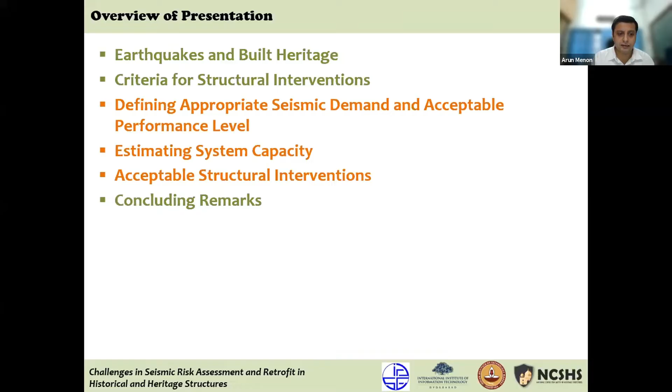So to begin with, if you're looking at built heritage, cultural heritage property, and earthquakes - natural disasters - earthquakes are some of the most violent natural disasters one can think of. India has seen its share of natural disasters and their effects. The human tragedies are there on one side, but then the silent loss of historical monuments, heritage structures is also something that occurs in each disaster, each natural disaster, each earthquake in any part of the world. Some more, some to a lesser degree, and this really comes from the concentration of historical property in different countries. So as far as historical constructions and heritage structures are concerned, there is an augmented vulnerability to natural disasters. This is because of their age, the deterioration over time, the various things that happen to the structure in terms of expansions, change of use, and so on.

The Bhuj earthquake, for example, on the 26th of January 2001, 20 years plus now, in the Kutch district alone there were about 15,000 heritage properties registered, and the earthquake resulted in about 10,000 heritage structures that were destroyed or extensively damaged, literally lost. We have seen no dearth of natural disasters after that - the Indian Ocean tsunami in 2004, the Kashmir earthquake in 2005, the Sikkim earthquake in 2011, the Kedarnath floods, the Kashmir floods, the Nepal earthquake which also affected parts of India, the Myanmar earthquake in 2016, and many more. This is only bound to keep increasing over time, the list will increase. It's something we really have to deal with, because when it comes to cultural heritage, once we lose it, there is very little way you can retrieve it. You can retain the memory of what is lost, but the tangible memory of what is lost is lost forever.

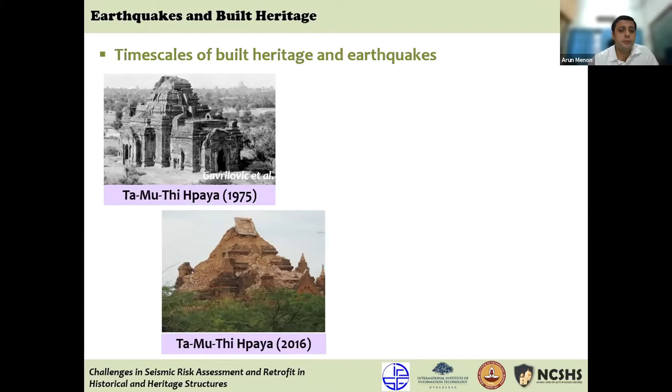But this site has seen earthquakes at regular recurrence intervals. In 1975, there was a massive earthquake, and in 2016, most recently, the same site was affected by an earthquake as severe as what happened in 1975.

As I said, this is not just in places like Burma, but also in India. If you take Bhuj, for example, we know of the Allah Bund earthquake in 1819 and the massive Bhuj earthquake in 2001 - comparable in magnitude and effect. The Nepal earthquake: we had the 1934 great Indo-Nepal earthquake, and Bihar was significantly affected, and 2015 was a very similar event. Bagan, as I said, in Myanmar, 1975 and 2016.

There's a wonderful book with respect to cultural heritage, built heritage, one could look at. The foreword of that book, written by Sir Bernard Fielden, begins: lessons must be learned continually, and we must always be aware that we live between two earthquakes.

When he says between two earthquakes, the professional - the structural engineer, the civil engineer, the architect, the historian - is dealing with historical monuments between two natural disasters. It's very unlikely that the same professional, in his or her career, can deal with the monument at two of these points in time. That's simply the different time scales of a professional career versus the recurrence intervals of these earthquakes versus the timeline of the existence of the monument itself.

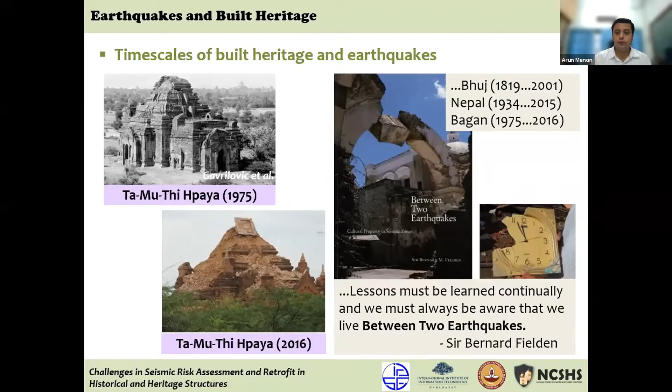When you look at buildings with a design life of 50 years or 100 years, the likelihood of the building experiencing an important seismic event twice gets lesser and lesser, but not so for historical monuments that have been around for quite some time.

Now, coming to the Indian context, we face the dilemma of the magnitude frequency relation in a country like India. To quote Professor S.K. Jain, in one of his landmark papers on the Indian earthquake problem, he says the Indian subcontinent faces a relatively high frequency of large earthquakes and a relatively low frequency of moderate earthquakes.

This has an impact because the frequency is such that within a generation you don't see too many moderate earthquakes, but also the chances of seeing a massive earthquake are relatively low. But someone in your family, your great-grandfather or grandfather, possibly experienced a massive earthquake. A few generations later, the memory of the earthquake is lost. So the memory and impact is very different in a situation like India, where the frequency of massive earthquakes is relatively large.

If you look at Bhuj, 180 years is the recurrence interval of that massive earthquake. The Nepal-Bihar earthquake is on similar lines. But if you look at how many magnitude 5 or magnitude 5.5 earthquakes a certain territory witnesses - to change the culture of building - we are quite badly placed. So there's a low frequency of moderate earthquakes and a relatively large frequency of these massive earthquakes.

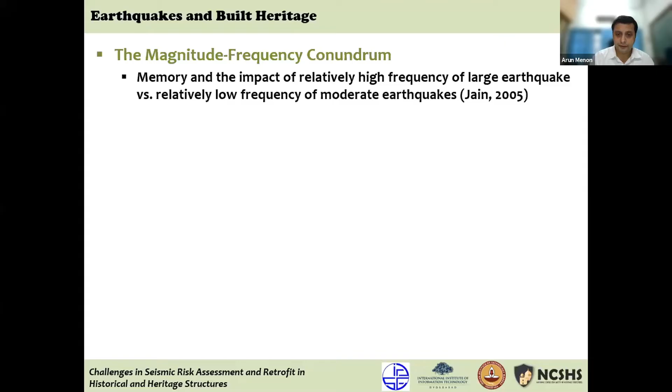So very often, because of the nature of the earthquake problem, we tend to be unprepared. The memory of the earthquake fades, and that is why very often even historical monuments are just put up the way they were, with very little interventions to ensure that before the next earthquake, adequate mitigation measures are built into the structure itself.

I'm just referring to this to give a sense of how different our problem is compared to other regions of the world. For example, the Pacific Ring of Fire, parts of California or New Zealand, or Italy or Greece, where the earthquake problem is much more present within the timeline of the human lifespan.

The 475-year return period global seismic hazard map is what you're looking at, and it actually reflects where we have a challenge. In this slide, you're looking at the updated map of the World Heritage Sites. Of course, the Bureau of Indian Standards is in the process, and today is a very important day, of looking at a new zonation map, and I'll have to make a significant change to this.

The map you currently see is from IS 1893 Part 1 2016, showing the 4 zones, Zone 2 to Zone 5. Superposed on it are white dots, which are the updated list of the 40 World Heritage Sites, the UNESCO World Heritage Sites that India has, of which 32 are cultural sites, meaning built heritage, whereas 7 are natural. One is mixed, with both natural and built heritage, and that is Khangchendzonga National Park, where there's some built heritage as well.

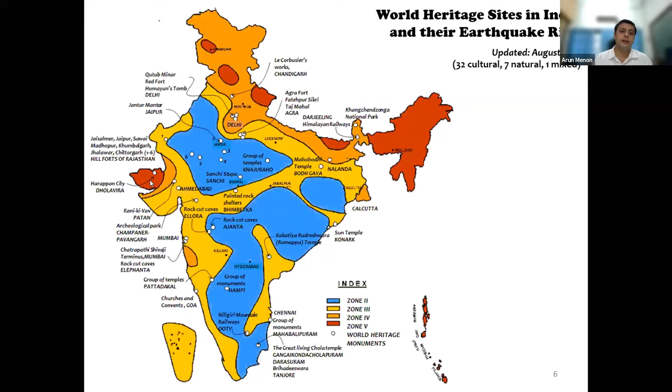Moving on, the fact remains that you need to look at the issue of timescales - certain regions not experiencing earthquakes within historic memory, but other regions seeing frequent occurrences, Nepal for example. The fact remains that if earthquakes have been in human memory for a significant period of time and multiple times, then you will see a change in the building culture.

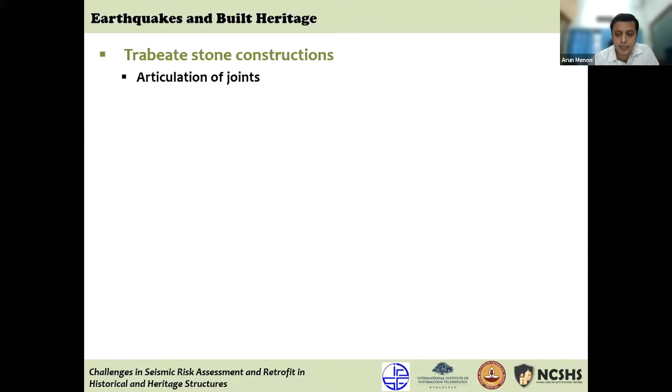And that's very important. So let me look at the issue of these stone constructions, trabeate stone constructions, post and lintel constructions. If you look at how joints are articulated, you have monolithic stone members, stone columns and stone beams.

My focus is on South India, where you have mandapas all over the place. If you look at how the joints are articulated in these historical constructions, you will see that they are simply supported. There is no positive connection, and no interlocking at these joints at all. If anything, there is some curvature, and that is only for alignment of the stone beam on the stone column. So we don't see any articulation of joints.

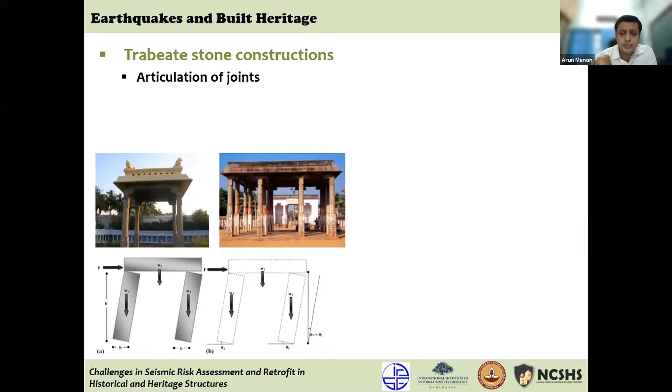You don't see any seismic resistant feature in the building vocabulary. If you look at peninsular India, and at construction details of historical monuments - these mandapas I'm talking about are about 400 to 500 years old - you will see no seismic resistant features at all. However, if you take these and do a standard safety check, you will see that even under design level, IS code level earthquakes, some of these constructions, based on their slenderness ratios and aspect ratios, can have potential problems under earthquake action.

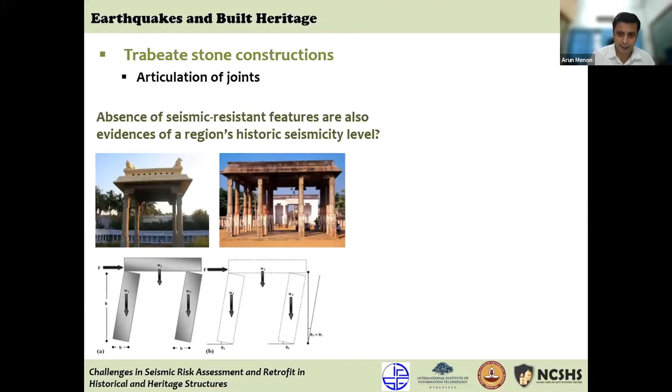On the other hand, if you look at Kathmandu Valley, if you look at Nepal, you can immediately see that these constructions have a conscious introduction of articulation of joints. You can see tenon and mortise joints, and significant sizes - you can actually see the sizes of the interlocking that is actually happening in these locations.

Sometimes joints are not sufficient because you can have large displacement excursions, and if you have deteriorated joints, that could be a killer. So tenon and mortise joints and the articulation - if I simply look at Kathmandu Valley and South India, I can see a vast difference in how these are articulated. That's the point I was trying to make: because of regional memory of earthquakes, or lack thereof, the building construction history is different.

Moving on, if we look at other regions in India - Kangra in Himachal, or Ahmedabad in Gujarat - you can see there is a vocabulary and use of elements in the structure which actually reinforce the necessity of earthquake resistance.

For example, if you look at these 400, 500-year-old constructions in Ahmedabad, you can see that these constructions have small wooden dowels sitting across blocks, embedded in lime mortar, and they connect all the stones together.

If you look at a collapsed temple tower, the mosque tower in the Bhuj earthquake, you could see these connecting dowels, and you could see that over time these have disappeared because it's wood, an organic material, and the lime has also been eaten away. So you have just dry packing of stones with nothing to hold them together and give them the necessary elasticity, which these brittle stone construction systems typically don't have.

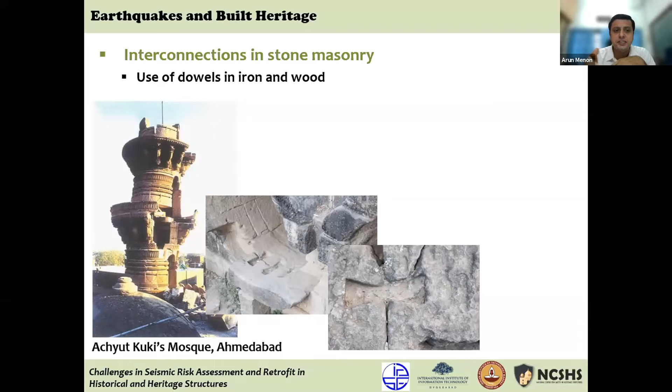So you can see how regionally there are features that tell you these constructions have imbibed seismic resistant features over time. That's something one should note while documenting such historical constructions - these are nuances to consider when thinking about repairing and retrofitting them after an earthquake, being conscious of interventions that can help improve earthquake resistance.

Another example is from Kangra Fort, which was very badly damaged after the 1905 Kangra earthquake. You can see everywhere there are metal dowels, iron dowels that hold blocks together, and that gives the necessary capacity to keep these blocks from completely displacing from each other.

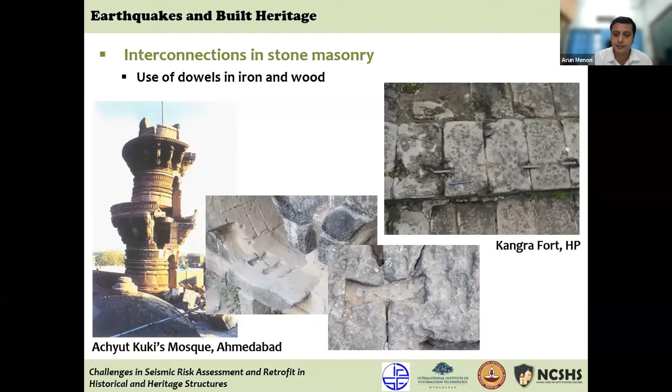So if I look at constructions in South India with the same lens and do an analysis, I'd say there's no capacity at all under lateral action. Using rigid body limit analysis, a lateral load analysis is done on these post-lintel constructions, which depends on geometry and assumes the material is rigid - the stone itself is not deformable. It's the joints which are really going to be opening and closing.

If one does mechanism analysis to understand the lateral loads or accelerations at which mechanism formation occurs in such constructions, it's interesting to map the BIS earthquake demand levels against such constructions. Even for the design basis earthquake you could have a problem - for Tamil Nadu, zone 3 partly, the design basis earthquake gives a zero period acceleration of 0.08 G. You can have a problem, and the factors of safety for the design basis earthquake start touching 1 and going below 1.

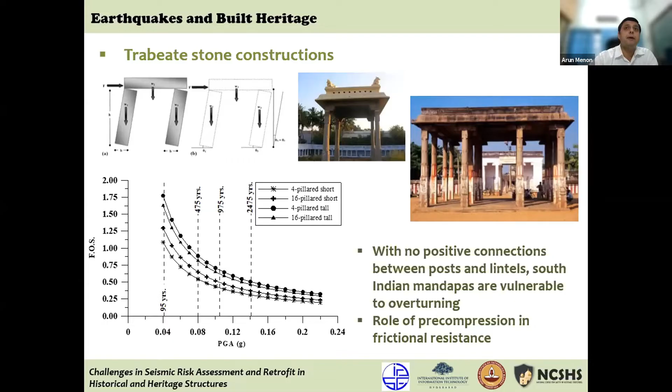When studying such systems, you have to understand there is frictional resistance between these units, and that depends on pre-compression. These nuances are important because any lateral resistance the system has in its existing condition depends on that frictional resistance.

Moving on, India then has a large number of traditional constructions which are actually seismic resistant constructions.

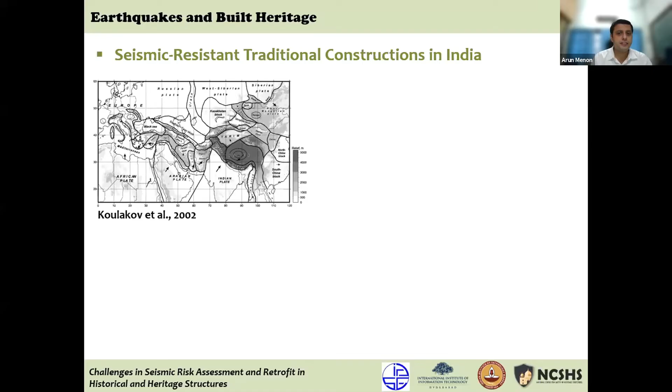India, if you look at the Indian subcontinent, it's part of this Alpine Himalayan belt. There's a belt that runs all the way from the Alps, which is a high seismic region, to the Himalayan region, through Turkey, Iran, Afghanistan, and the Himalayas, goes all the way to Myanmar. This entire belt has developed local seismic cultures, a phrase that is used quite often, called the LSCs, or local seismic cultures. And in all these locations, you can see constructions which have developed vernacular over time with the knowledge of what happens to buildings in these regions.

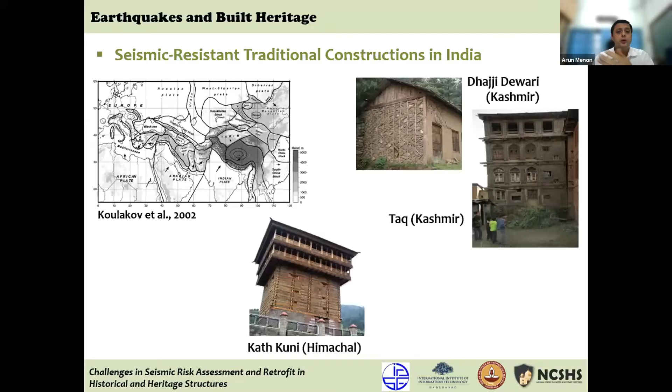The Dhajji Dewari in Kashmir Valley is one example, in Pakistan and in India. The Taq constructions, which are sort of isolation at different floors with timber in a brick masonry with mud mortar type of construction. You have the Kath Kuni construction in Himachal. You have the Ekra constructions in Assam and Sikkim, or the Assam type construction. And you have the pols in Gujarat and Ahmedabad and other regions.

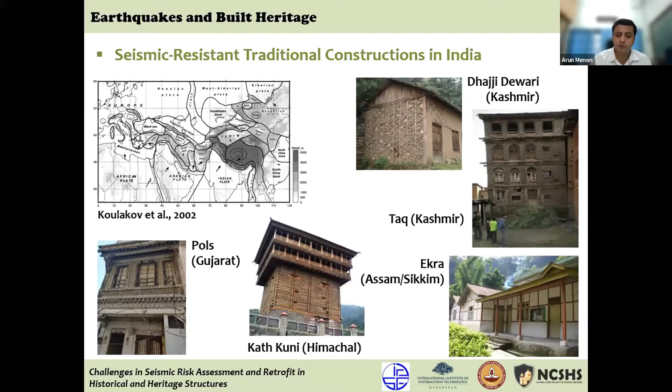So there are regions where seismic resistant local construction typologies have actually been developed and seen for 100 or more years. It's interesting, if you were to examine the pol in Ahmedabad, for example, which developed organically over time over the last 200, 300 years, you can see that these constructions - you can't immediately make out whether seismic resistant features have been deliberately built in, or are present not to a full extent - can give you an indication that they are possibly there to assist the system in necessary earthquake resistance.

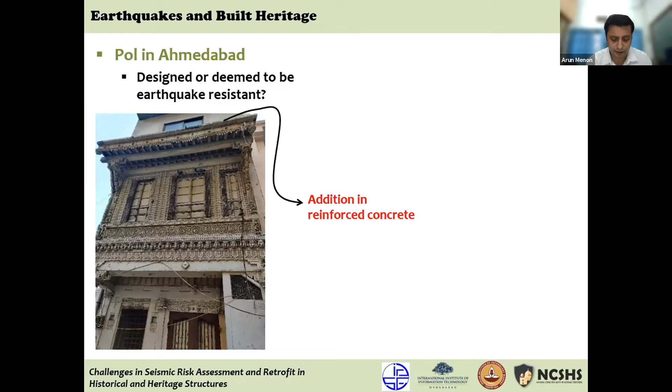So if you look at these constructions today, if you go to Ahmedabad and you look at some of these constructions, you have additions and repairs happening that really do not account for how these systems respond. For example, this addition of a reinforced concrete floor on top of such constructions, or replacement and removal of wood that is really decayed and damaged, and not putting it back. Removal and not replacement is a problem, because these systems actually depend on the ductility that the timber part of the structural system really provides.

There are lots of studies that have been done on architectural documentation of such constructions, and you don't see a very strong pattern of earthquake resistant features, but there are definitely good design parameters, conceptualization parameters, which improve the earthquake performance of such constructions. So what I'm trying to say is that there are several regions in India where such constructions are present. And when we look at assessing their capacity, when we look at understanding if they require retrofit, it's important to look at their construction details and the history of their construction.

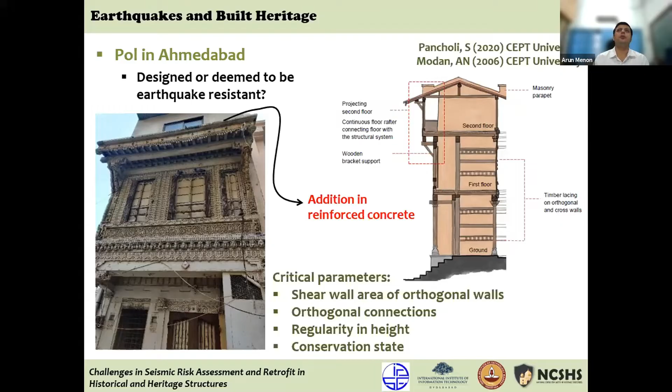And this is an important challenge today, because maintenance of such constructions is difficult. Over time, timber not being available or being too expensive is leading to no replacement of the damaged timber portions, introduction of reinforced concrete, and development of systems that are really unsafe for this typology. Because of this, recent earthquakes in Nepal and Sikkim showed behavior of these constructions which was quite bad, quite detrimental, and they seem to get tagged as unsafe historical constructions. But we forget that over time, the changes and interventions these undergo are also responsible. The modern interventions that these undergo in an insensitive manner are sometimes responsible for the poor behavior of such construction. So this is totally a different problem that we need to deal with.

So with that opening of the problem itself, let me move on to what could be defined as the criteria for interventions. Structural interventions is what we're talking about. What could be the criteria for structural interventions in historical monuments and heritage structures?

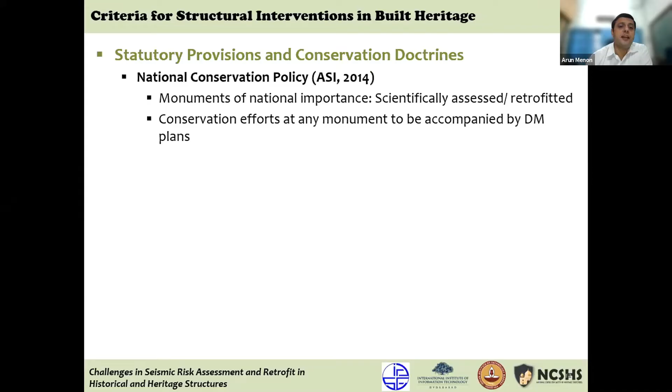There are statutory provisions, there are conservation doctrines available world over, and with reference to India, these are broad policy documents. The National Conservation Policy reference is to monuments of national importance. There is a need for these to be scientifically assessed and retrofitted, and disaster management plans have to be developed in each of these sites. We also have the NDMA guidelines now, which talk of how to deal with disasters in cultural heritage sites and precincts. And there are guidelines for museums because there are contents in a museum which have to be protected when there is a natural disaster.

So when you look at these constructions, when you look at this typology of construction, historical monuments and heritage structures, there are policy documents in India. We've still not moved towards guideline documents that can really make the work at the ground level significantly different from what it is today.

I make reference to this committee. It's called the International Scientific Committee on Analysis, Conservation and Structural Restoration of Structures of Architectural Heritage, and it is a scientific committee of a body called ICOMOS, International Council on Monuments and Sites, which is an advisory body to UNESCO. This organization makes clear there are guideline documents.

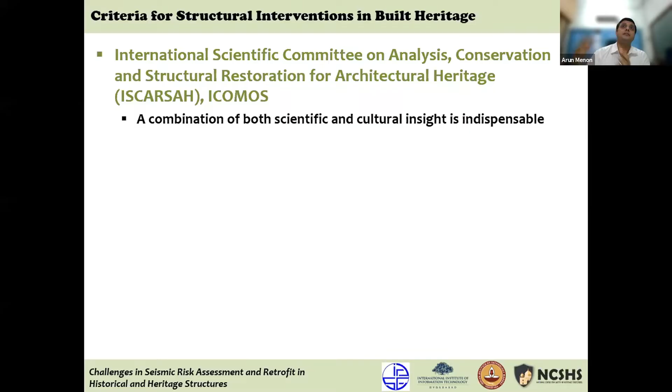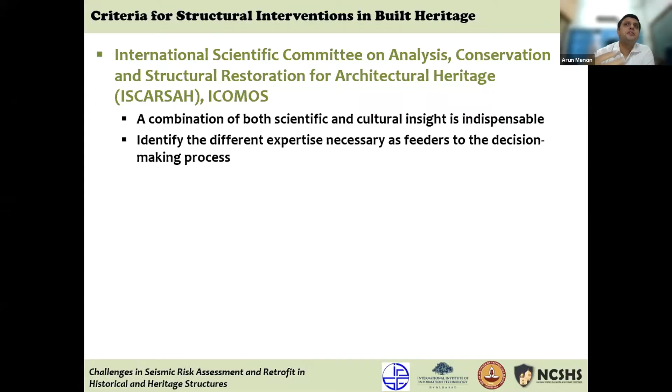There is a dialogue between different engineers, archaeologists, architects and art historians who deal with built heritage and monuments, making it very clear that a combination of both scientific and cultural insight is indispensable in dealing with these constructions. Engineers require the cultural sensitivity, while architects and archaeologists need to look at the scientific basis for structural interventions. They identify the different expertise as feeders to the decision-making process of what needs to be done when carrying out structural interventions in historical monuments.

It is interesting that this scientific committee really came up to bridge the gap between structural engineers and architects and archaeologists. It identifies this area as an interdisciplinary one requiring an interdisciplinary approach, and structural engineering can actually provide the scientific support necessary to ensure safeguard of the building as a whole.

When we say safeguard, we're really talking of ensuring life safety, but with the lowest possible consequence on the identified heritage values. There are heritage values for which the built heritage is known for, stands for. Those need to be protected, but in the process of safeguarding the building and ensuring it is not lost, we must be very careful that these identified heritage values are not tampered with or lost in the process of protection.

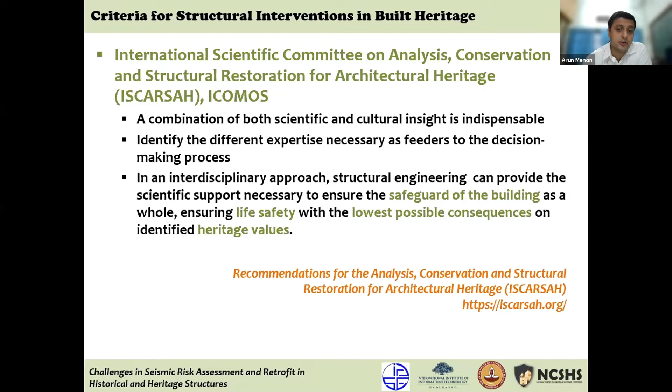You can go to the website of ISCARSAH and see the guideline recommendations that are there for the analysis, conservation, and structural restoration of architectural heritage.

With that premise, when we look at built heritage, it's important to understand what could be the criteria for interventions, be it diagnostic interventions where you're testing materials or taking them out to a laboratory, and also deciding what the structural interventions are going to be. It's important to define the criteria for interventions, starting with understanding the character defining elements of the built heritage.

Why is that construction so historically important? The character defining elements can be tangible and intangible, physically evident, and there are definitely aspects that are not physically evident, but those are the character defining elements of the built heritage. These must be understood by all professionals engaged.

For example, one of the earliest constructions where burnt clay brick is used represents an advancement in technology, and it's historically important evidence in the evolution of mankind. So the use of burnt clay brick as a technique of construction becomes a character defining element.

Or take, for example, the Scherzer span in bridges built across the seas. The Scherzer span opens up, as in the Pamban Bridge, which has a Scherzer span that opens. About 100 years ago, that was an advancement of engineering, and that is the tangible character defining property of that built heritage. These things must be understood by all professionals involved in such constructions.

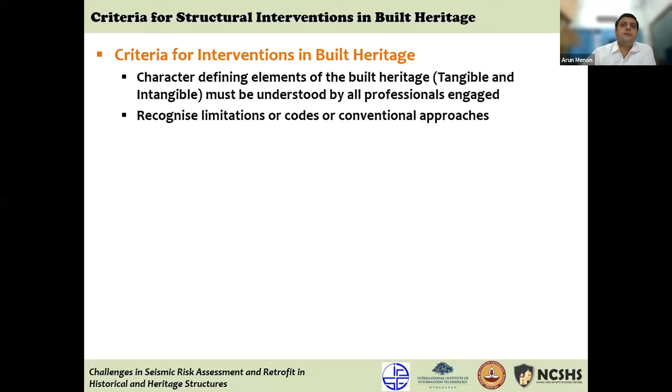Whenever you're engaging with such constructions, you need to recognize that codes and conventional approaches may have limitations, because typically these are developed keeping modern or new constructions in mind. There can be limitations if you try to apply this to historical constructions, because they don't fit in the gamut of the type of design approach that we adopt today for different typologies like reinforced concrete and steel constructions.

The process of approach to conservation should be through diagnosis. You must diagnose what the problem is. Of course, if you're looking at the earthquake problem, that's a very specific problem, but you can have multiple structural problems. Diagnosis must be the basis of any therapy, and therapy should really try to address the root cause.

If you have a headache and go to a doctor, the doctor may give you an aspirin. The aspirin directly takes care of the headache, but the root cause of the headache may be something different that needs to be addressed. Therefore, any diagnosis you do should determine what therapy to choose, and that therapy should address the root cause of the distress itself. Structural performance verification is essential.

Before intervention, what is the situation? And after intervention, where can you take the structure to?

This must be demonstrated, but we must be careful that it can't be only quantitative. You need a combination of qualitative and quantitative understanding. Depending solely on quantitative assessment is a problem because of possible uncertainties in the structural system that you don't know about, the materials, variability, and so on. So structural performance verification, both quantitatively and qualitatively, is essential in such situations.

Interventions must be minimal, such that you help the structure respond in the way it should, but not drastically change its character and affect the heritage values it stands for. You need to strike a balance between structural safety, protection of the values, and respect for the structure's authenticity.

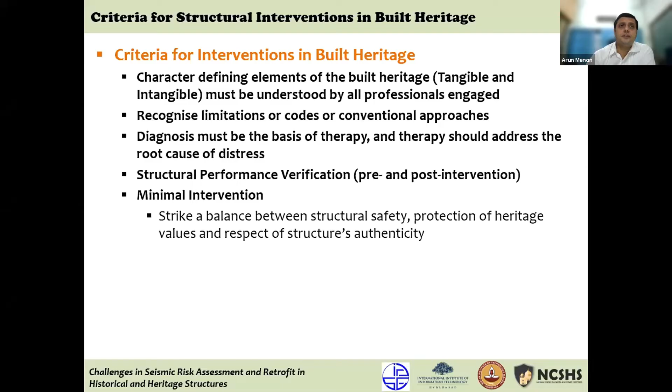I always give this example. If you have a damaged arch above which there is a load, maybe a wall supported by the arch, if you think the arch is damaged and go and embed an I-section above the arch, hide it away and say that this is taking care of the heritage value, you don't want the I-section to be seen, you embed it there.

Structurally, it might become safe. The load path is altered and the intervention may not be visible, but the structure's authentic way of resisting loads is through arch action. Now you have short-circuited that, right? This may be an extreme example, but it calls for thinking. Is it fine? Is it okay to introduce a beam-action sort of intervention where the structure was familiar with arch action? I'll leave it there.

You might want to think of what other intervention may help the structure improve the way it responds to loads. Maybe introducing a tie could be one possibility.

Avoid an overcautious approach to assessment and intervention. This is fundamentally the problem. When the uncertainty on the system is high, we tend to take an overcautious approach to assessment and intervention. When we don't know about the loads, about the way the system is responding, we want to err on the conservative side, but we tend to err a lot on the conservative side.

And that is a problem for cultural heritage, because you can change the character of the building and put in interventions which can never be taken out later. We need to look at this concept of strengthening versus improving structural behavior. I'll come to that point towards the end again.

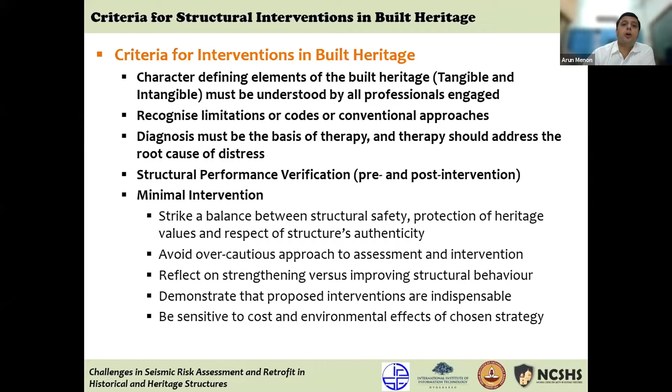But at the same time, we have to be sensitive to cost and environmental effects. We are living in a world where resources are scarcer by the day, and we have to be careful about what strategy we are choosing, even though we're talking of a very historically important construction.

There are certain criteria which we keep in mind when dealing with interventions in such structures. Compatibility is one - that is, the original materials and original techniques versus the new repair materials and new repair techniques. Compatibility can be physical, visual, chemical, mechanical, and a host of others. The deformability of the materials should be the same, and so on. You can have a whole host of compatibility parameters between the original and repair materials and techniques.

Durability of interventions - you don't want the intervention you're carrying out to last only 10-15 years when the monument itself has been living for more than 1,000 years, for example. There have been several interventions in reinforced concrete in historical masonry constructions, and people have realized that in a matter of 10-15 years there's so much corrosion damage causing further structural distress, but the monument did not have this problem for 200 or 300 years. So durability of interventions is fundamental - the intervention must at least last as much as the monument.

Non-invasive, as minimally invasive as possible. Non-invasive may be difficult to impose sometimes - you might have to cut, you might have to go into the cross-section, but try as much as possible to make interventions minimally invasive. It's almost like an old human body - you don't want to go in with heavy-duty interventions and surgeries. You can further damage or compromise the values of the system.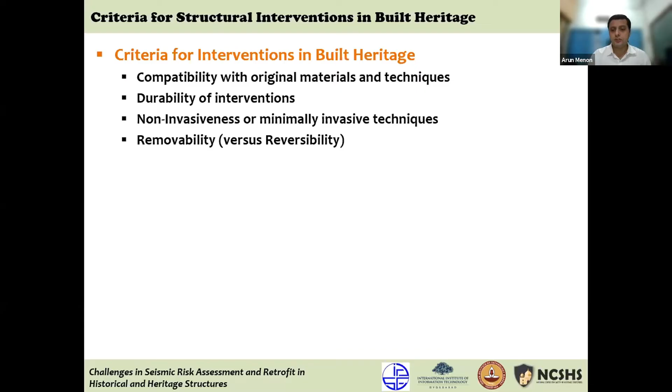Let us say you want to do reinforced concrete jacketing around a stone column or a stone masonry construction. There's no way you can remove it. That is irreversible because it is not removable. That becomes the criterion. You might face a situation where after a disaster, you might have to repair certain portions. And if your intervention that you've done in the past is really blocking you from doing anything more for maintainability of the structure, then your intervention is not appropriate.

Repairability of the structure post other problems is something that one must look at. And of course, on paper, some interventions look fantastic, but physically realizing them, someone has to execute it on the structure, and when you're talking of monumental constructions, this can become a challenge.

So one should look at feasible, physically realizable interventions, and you should be able to monitor whether the structural performance has improved or not. Put some gauges, do some health monitoring, and understand if there was tilting of a wall, has it stopped? If there was bulging of a wall, has it stopped? If there was sinking, has it stopped? You should be able to monitor the structural performance after you intervene. That is again an important criterion.

So moving on, I come to the core where, as I said, I raise questions.

Excuse me for a second. I just wanted to exit the full screen option, I don't see part of my screen. Hello, can you help? Yes. No, just a second, I was exiting from the full screen option. You just go to the top of your screen, view options are there. It's actually okay. I don't see it, normally that exit full screen mode used to be there. That's not showing. Okay, okay.

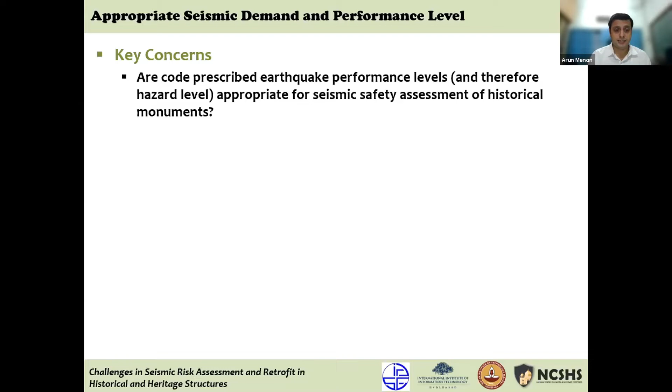It's a question. Now, I want to just bring out a little bit of a contrast. If I were to look at the number of codes that talk about retrofitting, that talk about safety assessment, IS 13935 talks about safety assessment of reinforced concrete structures and other types of structures. There is a statement in IS 13935 which goes: special buildings of monumental nature, implying monumental structures or historical monuments, analyzed using seismic actions as per IS 1893 part 1, you should basically go with adopting a higher importance factor or adopt the maximum considered earthquake. When you're designing new constructions, you normally use a design basis earthquake.

A DBE, or you use an importance factor of 1, or if you think a different typology with importance factor 1.5 is applicable, you use that. But then there's this statement in IS 13935 that says if it's a monumental building, you can increase the importance factor or use the maximum considered earthquake.

Now what is the implication of that? Your design forces are going to increase. And then you have to look at whether this building was actually designed and constructed with this sort of framework in mind. Absolutely not. You look at IS 13828, of course, that's for low strength masonry constructions, and it talks about using an importance factor of 1.5 for monumental buildings.

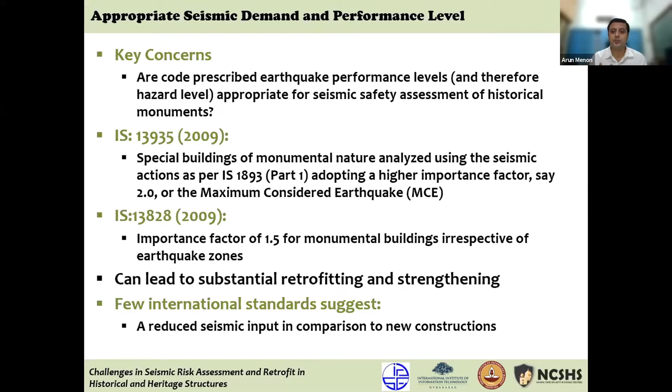So where is this rationale coming from? Let me go to these two documents that actually talk about reducing the earthquake input, which sounds counterproductive. You want to keep this monument forever, for thousands of years, and then you're saying reduce the earthquake input.

Now if you're looking at a larger design life, the earthquake input is also going to keep increasing. For all of you that know probabilistic seismic hazard analysis, your hazard curves only keep increasing over time. Of course, it becomes unrealistic beyond the length of the earthquake catalog that you have, but numerically it will keep increasing.

So what do the Italian guidelines say? This is the document called the Guidelines for Evaluation and Mitigation of Seismic Risk to Cultural Heritage, produced by the Ministry for Cultural Heritage and Activities in 2007. It talks about a reachable or attainable seismic safety index.

It says that you should be able to estimate a seismic safety index. And what is the seismic safety index? It is the ratio between the level of attainable seismic protection compatible with the necessities of the building. You're looking at a historical building with a certain function, and the desired level of protection based on its category of use and importance.

So basically it's saying you want to increase the seismic safety level to the protection level, to a certain value, but what I can attain is different. I cannot treat it like an existing normal building and increase it as much as I want, because the values and the historical character of the building can get affected.

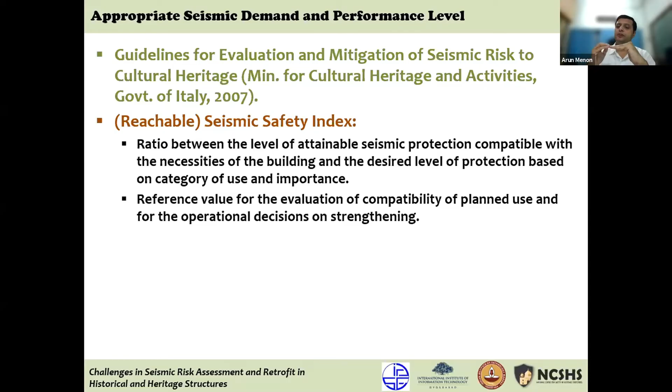You want to use it as a museum, you want to use it as a restaurant, an old building being used as a restaurant, for the operational decision, and also for operational decisions on strengthening. So once I arrive at the seismic safety index, if it is inadequate with respect to the input level, I can decide how much to push it up carefully, such that it does not affect the historicity, does not affect the historical values for which it actually stands.

And so the seismic evaluation levels, there are different levels of evaluation that it prescribes. A level one evaluation is only qualitative.

A second level is where, in historical masonry constructions, it is useful to look at local collapse mechanisms which do not compromise the overall structural safety, but local things like parapets falling off, gable roofs falling off, chimneys falling off, or individual walls having out-of-plane failure.

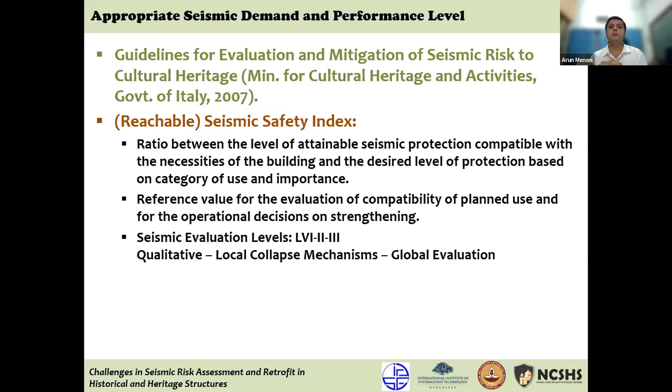The third level is when you do a full global evaluation. So you do a qualitative check, a local collapse mechanism check, and a global check. This becomes the basis of the capacity of the system.

What is the available safety, and that versus what is desirable, is what gives you the seismic safety index. The guidelines then say you have to look at 3 different limit states. The first is an ultimate limit state, where you want to ensure that collapse or partial collapse of the building does not compromise the people working there. Life safety has to be guaranteed, so it safeguards against a rare, high intensity shaking.

The second level is a damage limit state. You want to limit the effects of structural damage, the economical and functional damage, and this will be for a more frequent earthquake of lower intensity shaking. A museum, you don't want it to just go bust with no visitors for 3 years, 10 years. Economic problems can crop up because of such situations. So you want to limit the structural damage.

The third category is a limit state of damage of works of art. For example, if there are paintings, or bas relief sculpture on walls, you don't want that to get damaged, because it's a non-structural component, it is a render. If that were to get damaged, then the cultural value is lost.

Can you think of the Last Supper painting on a wall in a church in Milan? If an earthquake shaking is going to lead to that entire mural painting getting damaged, it's non-structural damage because it could just be plaster cracks. But if you lose the whole painting, then the value of the entire building is gone. It's such a valuable site. That's where the third limit state comes in.

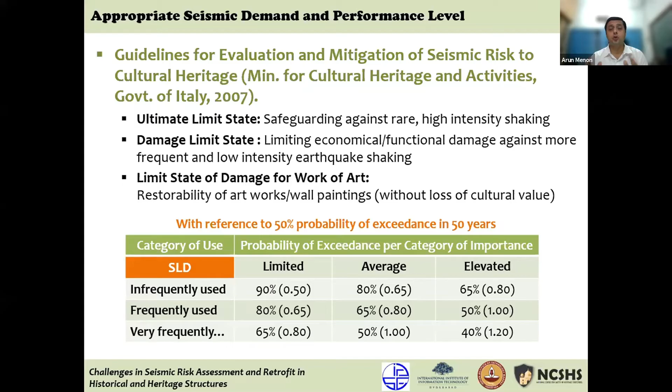This is an important deviation: there is clearly a prescription to reduce the earthquake input, because the earthquake inputs defined in the code are meant for new constructions. However, the requirement is that the structure should not collapse, and if partial damage occurs, it should not kill people. That doesn't change, that has to be taken care of. However, these numbers show there is an intent to reduce the earthquake input.

I take the second example, which is the New Zealand Technical Guidelines for the Seismic Assessment of Existing Buildings, 2017 from New Zealand. Here they introduce a concept of percentage compliance to the new building standard. You have a new building standard, and the earthquake code says this is the earthquake input that you use for new construction, and you introduce a percentage NBS. Percentage NBS means you take the existing building and check how much it complies with, and there are ways of arriving at that quantitatively.

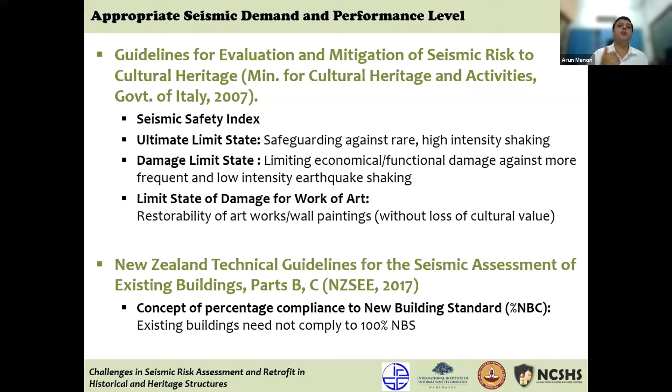How much does it comply with respect to the new building standard requirements? There's a very clear statement: existing buildings need not comply to 100% of the new building standards. So here again you see an example where the input is prescribed to be lowered for existing buildings, but also for culturally important buildings. With that thought, let me move on.

Once you look at defining earthquake input, and that area needs to be further discussed and articulated in our country, in our guidelines, we move to the second part. It is linked to the seismic performance verification, that is, you have to estimate the capacity of the system. As I mentioned earlier, you could do it qualitatively, but you can't stop there. You have to go into some quantitatives.

The Italian code talks about using local mechanism analysis for parts of buildings and global analysis. So there are different options available because you'll have to deal with structural modeling and seismic analysis. But one has to be very careful about the underlying assumptions in the choice of certain elements, analysis approaches, and so on. So you have a whole set of possibilities here.

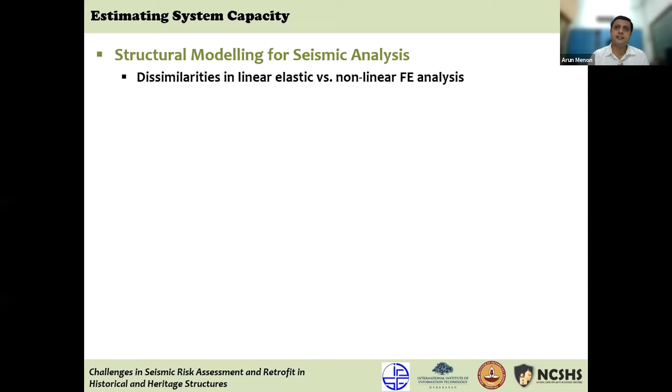But it's important to understand one fundamental distinction, which is the use of linear elastic analysis versus nonlinear analysis for materials which are weak in tension. Particularly when you do finite element analysis and decide to do linear elastic analysis instead of nonlinear analysis for materials like masonry, which have low tensile strength, it's problematic.

If you take a symmetric construction, a simple multi-storied construction with openings, there is symmetry in the wall that you're seeing. But if you were to subject this to lateral forces, you have axial forces and lateral forces. If you subject this to overturning effects of lateral force, then in a material like masonry, which has tensile strength significantly different from compressive strength, the three piers you see here—the left pier, the central pier, and the right pier—because of the overturning moment effect in terms of axial load, the states of stresses in the three piers are going to be different.

If you were to consider a linear elastic analysis, where I don't differentiate between tensile strength and compressive strength, you can have a problem in the distribution of the lateral effects in the three piers. The nonlinear analysis will be able to capture this immediately and tell you how the three piers, because of the level of axial compression being different in them, will have different shear capacity.

So you see the three piers here, and the lateral load that is distributed to them. Elastic analysis will tell you all three should get equal proportions—depending on their cross section and aspect ratios, pier 1 and pier 3 should get the same proportion of lateral force, and pier 2 depending on its cross-sectional properties. But if you do a nonlinear analysis, the level of compressive or tensile stresses will dictate the stiffness of that member, and the distribution of lateral force to these three will be different.

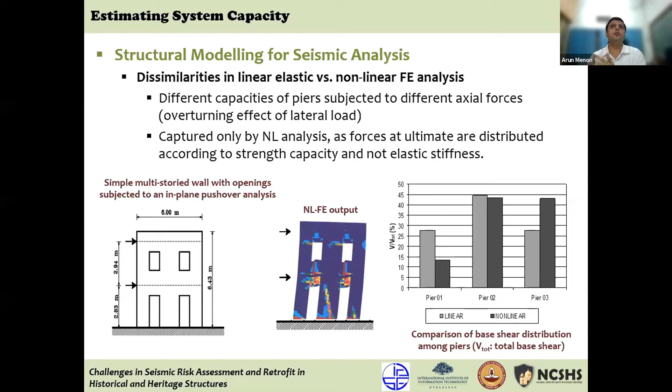For a material which is weak in tension, this is something fundamental. If you adopt linear elastic analysis, there's something completely missing in the way the model will respond compared to a nonlinear analysis. This difference can be captured only by nonlinear analysis, unless you are conscious of this and put in checks in your results, as forces at ultimate are distributed according to strength capacity and not elastic stiffness. So this fundamental difference means that if you're working with masonry constructions—and most of our historical monuments are masonry constructions—linear elastic can be a starting point, but not the one you want to base your critical decisions on.

Moving on, the world today provides so many different opportunities and ways in which you can model.

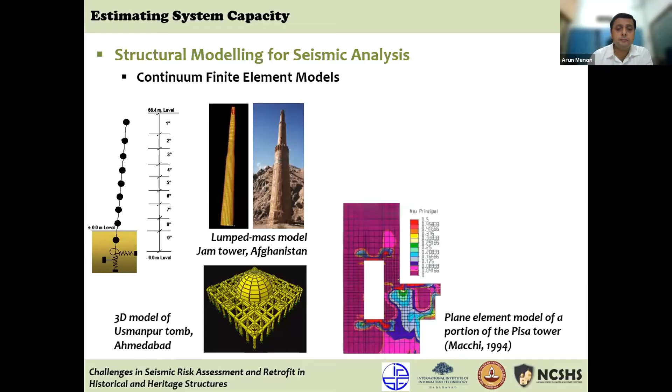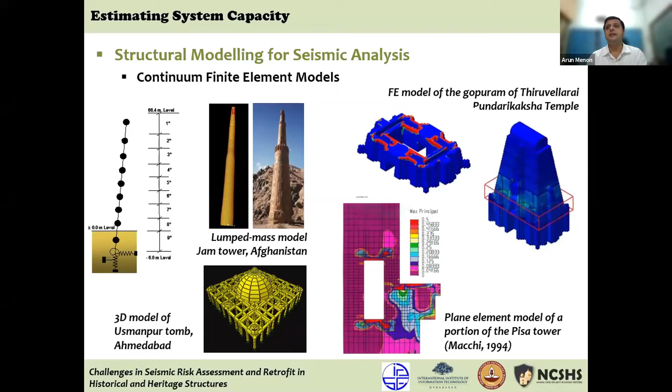It can be from simple, robust lumped mass modeling with soil structure interaction models incorporated. You can do a lumped mass finite element model of these systems, or a three-dimensional finite element model using a continuum finite element approach. It could be a planar model or a solid model of the entire construction. So you have all these opportunities. One has to be very clear about the appropriateness of a certain continuum modeling approach with respect to a certain typology of masonry and the capabilities of the elements being used.

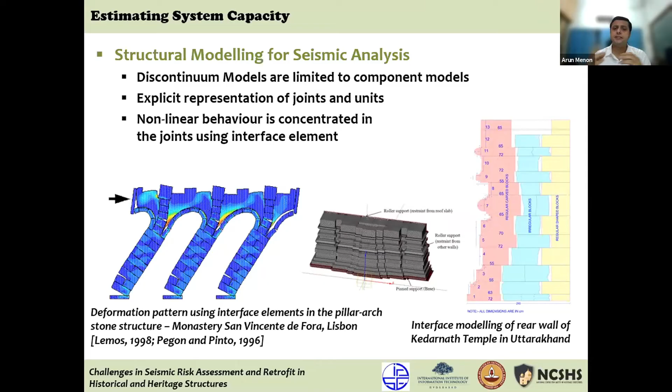You could use discontinuum modeling. We saw continuum finite element modeling. Discontinuum modeling is very appropriate when you look at blocky stone constructions with no mortar, so stone-on-stone dry stack constructions. You want to use discontinuum models for this. Sometimes this can be further integrated, using nonlinear finite elements with interface modeling, or going for discontinuum modeling, where you're able to represent the different parts of this masonry. This is another opportunity in terms of modeling.

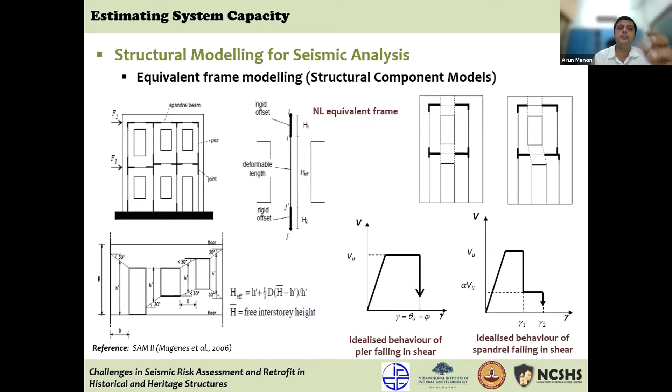Masonry constructions can be modeled in different ways. We saw continuum finite element modeling type approaches, but you could also do component modeling, structural component modeling, using what is called the equivalent frame modeling approach, which is adopted for rather regular masonry constructions. If you don't have a dome and if you don't have arches, this modeling approach is adopted, where you designate the piers and spandrels as frame elements and give them hysteretic rules, shear and flexural hysteretic rules, and this can be assembled to represent the overall three-dimensional geometry.

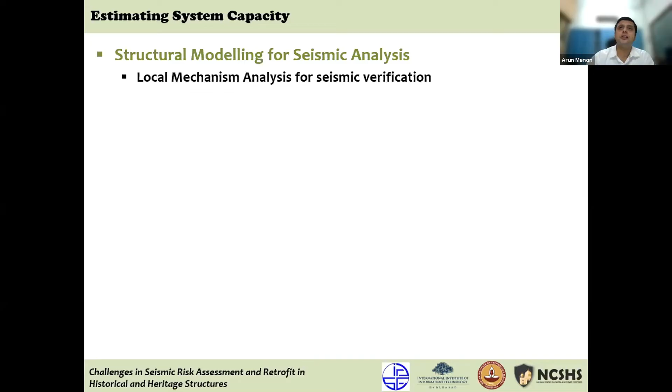But as I said, when dealing with masonry constructions, and especially historical masonry constructions, there will be parts of the building that respond not in a global manner, but more in an independent manner, and therefore you need to do local checks. A parapet might fall off, or a gable wall might fall off, much before the building can actually show significant damage due to an earthquake. So local mechanism analysis is essential for seismic verification.

Here we are really looking at loss of stability because of equilibrium issues rather than exceedance of material strength. So rigid body analysis is something that is adopted here, and kinematic limit analysis based on principles of virtual work can be used to estimate at what level of horizontal acceleration a mechanism can form, which is the capacity of that member, of that portion of the structure.

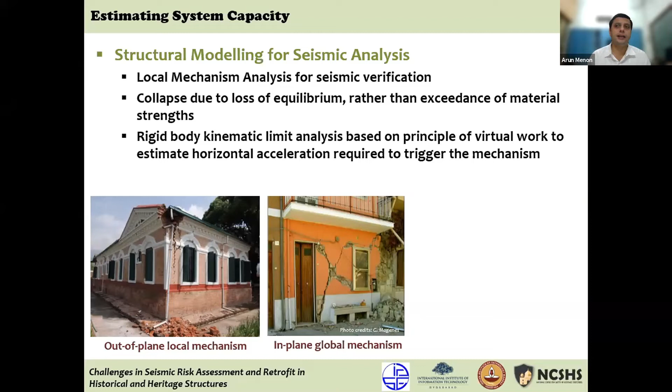So you can see a part of a structure might detach and tend to fall off rather than the entire structure showing shear damage, as you see in the right figure. A global mechanism would mean X cracks and so on, but detachment of a wall would be a local mechanism, and that local mechanism might not be captured by a global analysis. You might need simpler limit analysis based approaches to capture the capacity of the system there. So you can work on rigid body analysis, basically trying to find out at what overturning force a mechanism is formed and what resisting force is available in the system itself.

Just to give you some examples of certain nuances one has to look at, because as I said earlier, insight into these constructions, the typology of construction, the material, the history of construction, and the construction methods used is extremely important in modeling and understanding the behavior of such constructions.

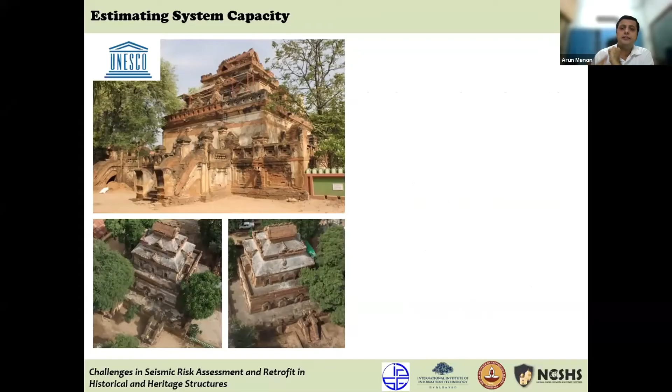This is an example of a historical construction from Myanmar, and the structure has magnificent paintings inside on one floor, but the structure has actually undergone a lot of structural damage. This is in Bagan, so 1975 earthquake versus 2016 earthquake. In both earthquakes it got damaged, and there are interventions that were carried out in the structure after the 1975 earthquake. So how do you handle them in the new analysis is an important thing.

In the 2016 earthquake, upper portions of the structure got damaged. In the 1975 earthquake, the lower portions of the structure were severely damaged, but interventions were carried out. If you can see a band here, there's a reinforced concrete band that was introduced in the 1990s as a structural retrofit intervention in the past. But that was not carried out in all the floors, and so upper floors got damaged while the lower floors survived in the current earthquake.

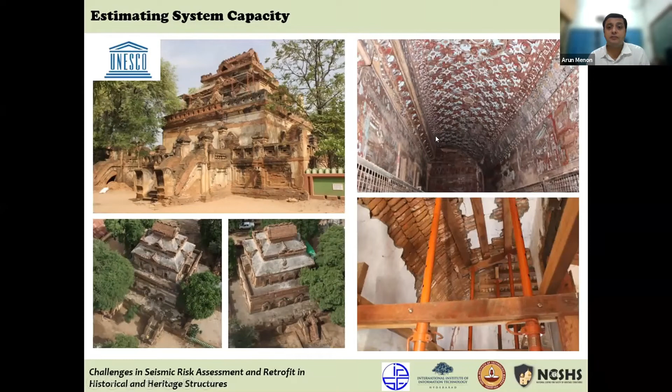So if you were to look at modeling and analysis of this sort of construction, it's important to know the structural typology and the construction techniques used in the past here.

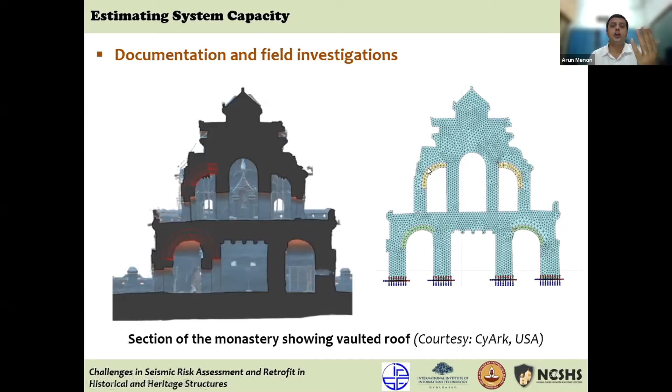We found a very interesting way in which the arches and vaults were constructed, very different from the true arch mechanism. We are familiar with corbelling as a technique for arch construction versus true arch construction, and here we encountered a system combining corbelling and true arch construction. This nuance had to be understood and reflected in the numerical modeling, so what you can see here is how the numerical model is trying to reflect this difference in the structural cross section. This needs to be examined to see whether it has a role to play in structural safety.

Again, as I was mentioning, part of the vaulting is corbelled and it's finished off with true arch construction. Now, how do you deal with it? These are two different systems, and if you're aware of this in your numerical model, you can try to make the model reflect that and see if the construction technique has an effect, and whether there's a way of addressing it in your analysis itself.

Yeah, and in a couple of minutes, I think I'll try and close.

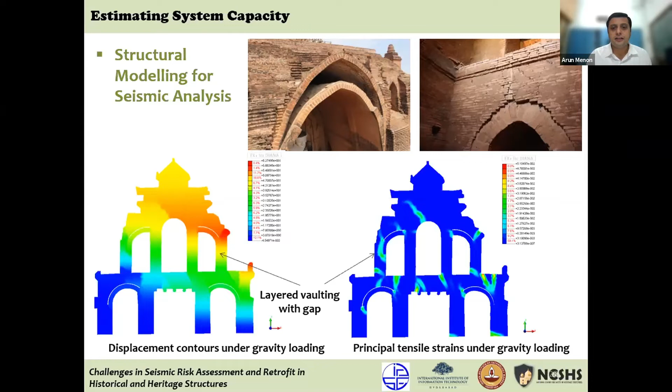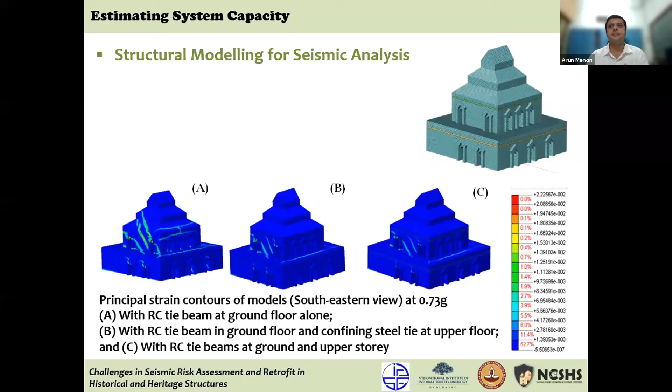It's important to reflect the existing condition of this sort of structure. The structure was affected in the 1975 earthquake, and reinforced concrete bands were introduced, but these bands are sitting only at the lower level, not at all levels. So it was important to model it to see if the 2016 earthquake damage could be replicated, and understand what we should be doing today to improve the earthquake capacity of this construction. So, the original construction with the reinforced concrete band and potential new interventions, being conscious that we must choose compatible interventions. One can try different intervention techniques and then look at whether structural performance verification is feasible.

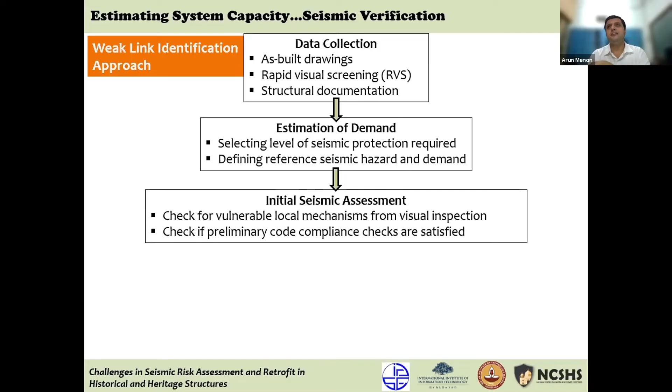Just to close, here's a way the seismic verification approach could proceed for historical masonry constructions. There are several weak links in these structures, and it's important to identify them because the capacity of the system is limited by the weakness of its structural members. Similar to what the New Zealand code proposes, this is a weak link identification approach: you collect as much information as possible, you may need to make drawings if you don't have them, estimate the seismic demand, and establish the level of seismic protection required. You can do an initial seismic assessment, more qualitative than quantitative, but it could also be made quantitative for local mechanism analysis, then check for other code compliance in the structure.

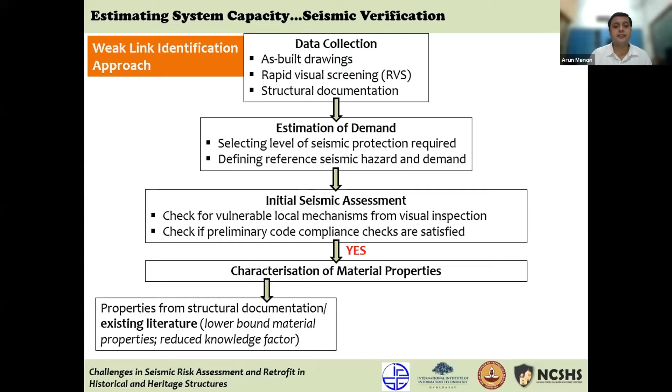This initial seismic assessment is followed by material characterization, which can come from existing literature, or you may want to carry out tests, or do a comprehensive testing program in the structure to get the data required for modeling.

Once you do the initial seismic assessment, if the structure does not comply with the minimum requirements of the mechanism checks, you would have to go and look at level 1 seismic strengthening. Are connections working? Do you need to introduce a continuous band? Do you need out-of-plane wall strengthening to prevent out-of-plane failure mechanisms, and so on?

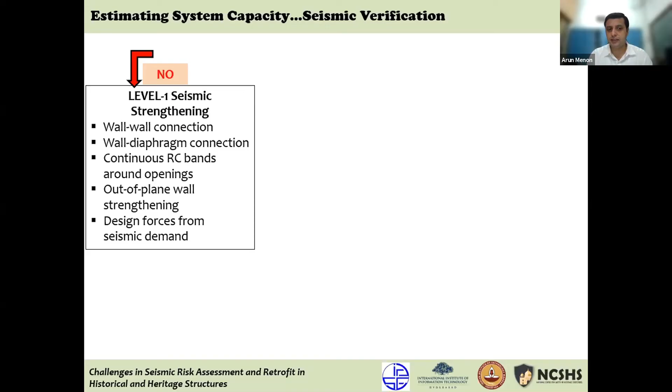Once that is done, you need to check if the out-of-plane piers and walls have their capacity. If they don't, you go back to level 1 seismic strengthening and ensure out-of-plane strengthening is provided. Then check diaphragms—if they're flexible, you might have to look at level 1 strengthening again. If they are semi-rigid or rigid and pass the check, you move to the next stage.

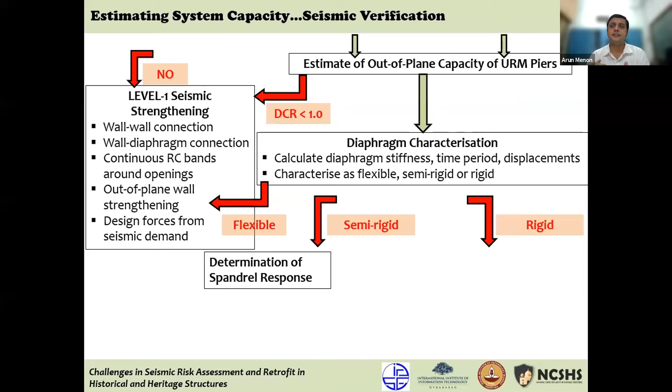The next stage is understanding the other structural elements, the spandrels and piers, and making the checks. There are situations with interactions between piers and spandrels that you can also check. At each level, you're trying to identify and eliminate the weakest link. You don't want the system to have portions where such failures happen, because the capacity of the system would then be limited by that weak link. You identify that weak link and create an intervention to address it. Then the system can withstand a higher level of earthquake shaking, and you proceed systematically until you reach the global capacity of the system.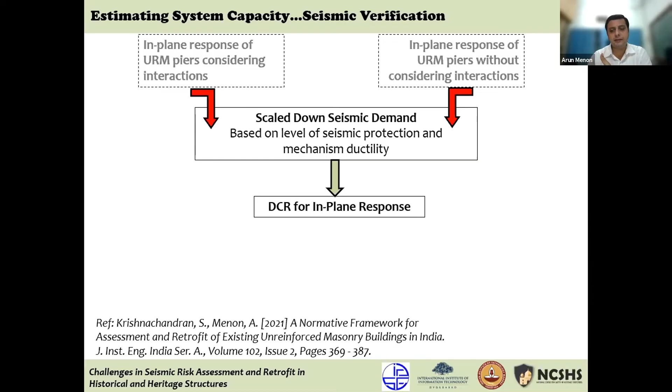So the global mechanism is an in-plane mechanism, and you will check the demand to capacity ratio there to see if any further strengthening is required. That's how earlier the level 1 strengthening was done, and now you come to level 2 strengthening to ensure the system is capable of resisting earthquake shaking, that the global response is adequate.

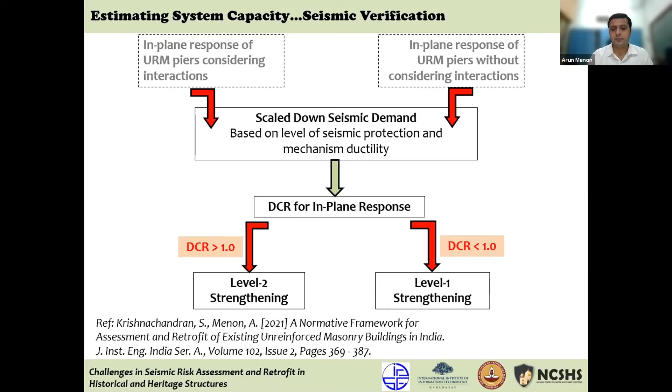Let me come to the last part, which is about interventions. I'll take a couple of minutes to wrap this up. I won't go too much into detail, but historically, over the last 200-300 years, we've seen how heavy engineering interventions have been carried out with the intent of saving the monument.

A classical example is how stiff concrete abutments have been put in place in the Colosseum, one of the oldest monuments in Europe. Today it's all frozen, the cracks are filled up with epoxy, and you have this heavy concrete abutment. Of course the structure is safe, but one would have to note that the abutment does not belong to the original construction, it is a later addition.

So there is an interference with the historicity happening here. Another example is from Bagan in 2016 - a historical monument constructed between the 11th and 13th century. After the 2016 earthquake, the heavy reinforced concrete ring beam at the spire led to collapse of the spire, with the entire ring beam and spire coming down, while the rest of the structure remained intact.

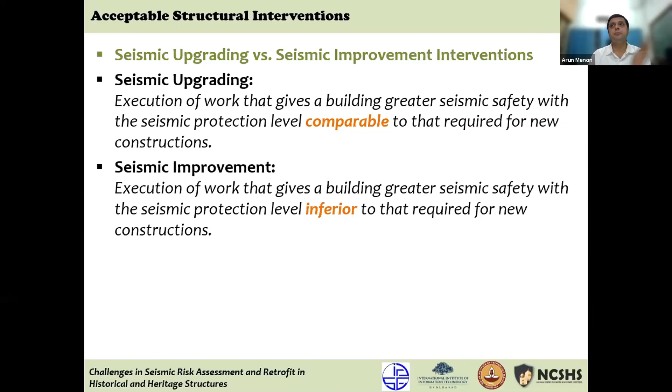So one has to distinguish, when looking at historical monuments, between upgrading and improving. Seismic improvement is the way forward, not seismic upgrading.

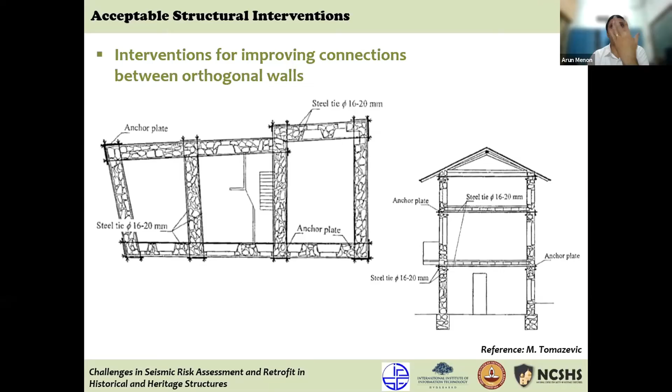I'll close with a few examples. Interventions such as providing ties and ensuring integration of all structural members in the system - the walls with the floor system, tying between walls and floor systems and roof systems - is a very useful intervention for seismic improvement. It allows the system to function as one, which is fundamental to the earthquake resistance of masonry construction.

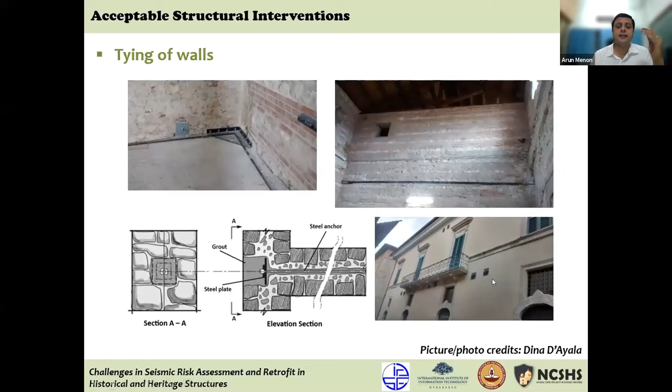Tying of the wall can be done in very nuanced manners, but adequate for the kind of demands it can see. You can see very small ties strong enough to keep these walls together. They could even be seen from outside, as interventions carried out for seismic improvement.

It's also important that we work not only at the system level, but also at the material level. Sometimes you might have to grout and improve the quality of the masonry, introducing elements such as through-stones. Sometimes these through-stones can be in concrete if you're not able to find stone. Put these through-stones such that the wall remains one integral piece.

Then introduce, for example, the intervention prescribed in IS 4326, which is about a wooden seismic band, such that the walls actually work with each other. So you need to think of member, system level, integrated with component level and material level interventions when conceiving the overall interventions in such constructions.

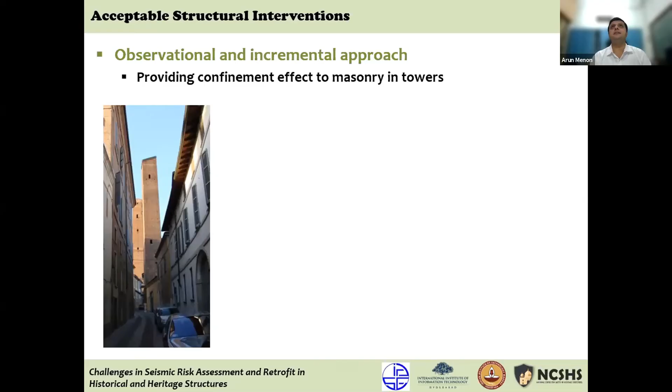Sometimes something as simple as a temporary intervention - not temporary, rather removable - such as providing confinement to masonry towers, is useful. If you provide confinement, you're working against Poisson's effect, and by working against Poisson's effect, you automatically increase the compressive strength of the material. Such interventions can be executed in several ways.

One of the ways is to do jacketing. You can do jacketing with concrete, or with fiber reinforced plastics, introducing confinement effects. But you could also do it in a reversible manner, respecting the authenticity and historicity of the material.

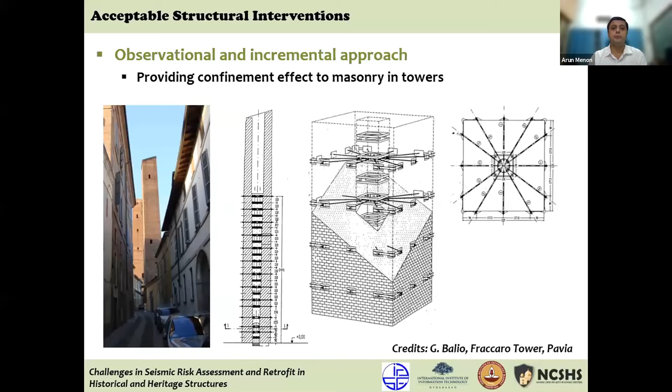This could be a fundamental difference in the material and the way you approach historical monuments for improving the structural performance of this sort of material.

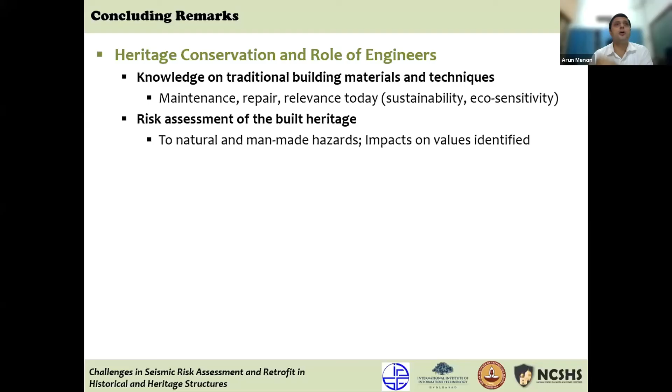To conclude, this is a very vast area, and today we have a large number of people working here, but engineers are still few, and really there's a lot of room for engineers to work in this field of heritage conservation. But you require knowledge on traditional building materials and techniques, which often we don't teach in our undergraduate and postgraduate programs, but you can always pick that up, because this is important from maintenance, repair, but also the relevance of these techniques today from sustainable, eco-friendly ways in which our ancestors constructed.

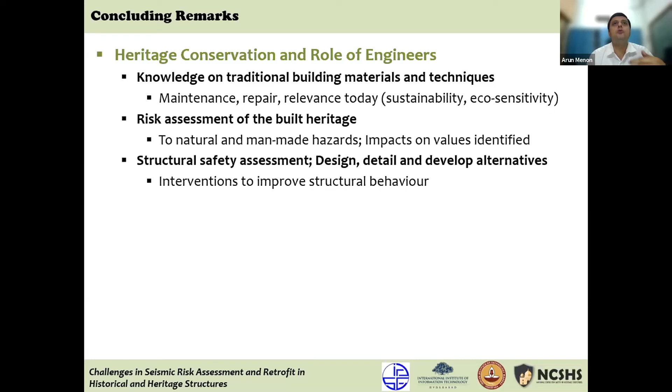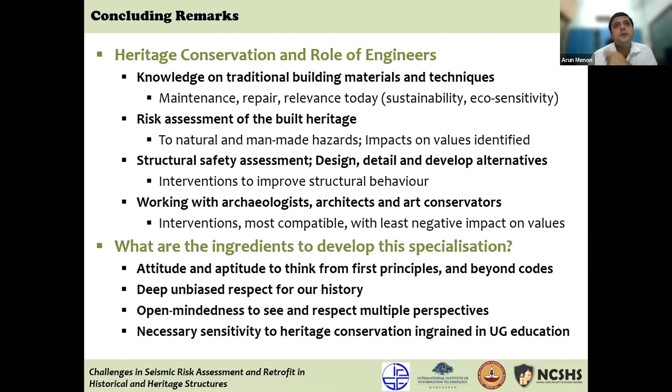Risk assessment is another area of built heritage where engineers have to come in: natural disasters, man-made disasters, vulnerability analysis. Impacts on the values have to be identified simultaneously. Structural assessment, safety assessment, design, detail, develop alternatives. Understand that there can be multiple interventions and choose these interventions based on how minimalistic they are in terms of impact on the values. You need to know that this is an area where you work with archaeologists, architects, art conservators, and try to find interventions that are most compatible and least negative in impact on the values. The ingredients for this specialization are an attitude and aptitude to think from first principles, beyond codes, a deep unbiased respect for our history, open-mindedness to see and respect multiple perspectives, and necessary sensitivity to heritage conservation, which we can ingrain in undergraduate education.

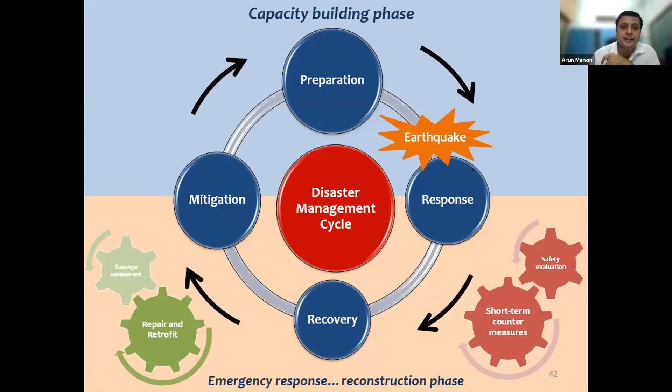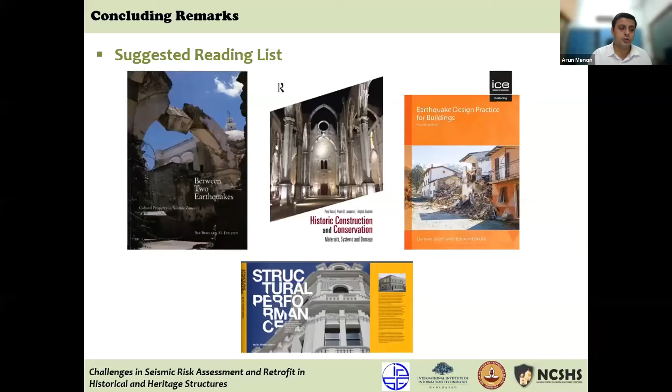Thank you. I have taken more time than allotted to me, and sorry for the initial glitch.

Thank you, Professor Arun. That was really a wonderful lecture. Personally, I have drawn a lot of insights, because the research team at our place also works in this area, assessment and retrofitting, but of more simple structures, RC and masonry buildings. But your lecture has once again proved that it is a collaborative effort, not a single standalone structural engineer or architect or historian or expert in culture. So really wonderful, and I thank you.

There are several questions in the chat window. I'll go through these first, and after that I'll request participants to raise their hand so we can give you the option to ask directly. First question is by Professor Mainak Ghoshal: could you cite the difference between cultural, natural, and built heritage?

Yeah, so we broadly say cultural heritage, but cultural heritage can be classified as natural heritage and built heritage. Natural heritage becomes part of cultural heritage because, take Kanchenjunga for example, the mountain is revered as a god. So that becomes part of the natural heritage of that area, part of the cultural heritage, but it's part of nature. That's an example of natural heritage. It could also be a biopark or something of that nature. But if you have man-made constructions, human-made constructions, that's built heritage. So that's the fundamental difference between natural and built heritage.